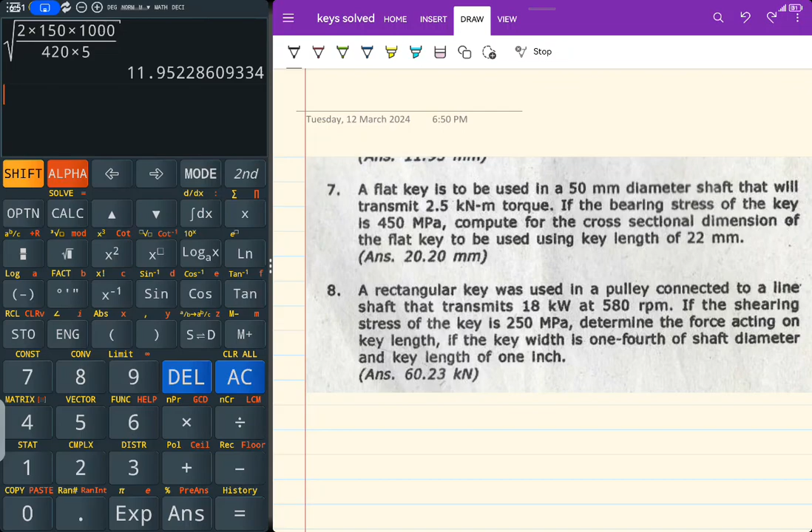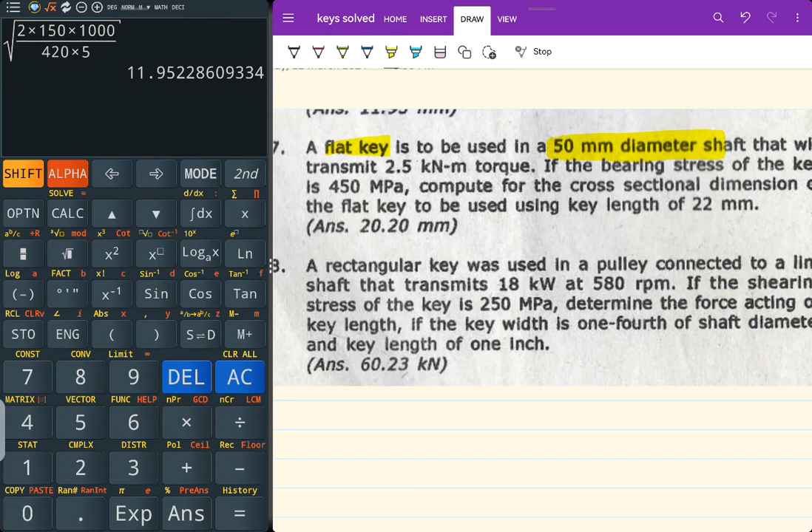So part 3, for the solved problems on keys, let's go with problem number 7 and 8. Okay? To start, a flat key is used in a 50 millimeter diameter shaft, okay, that will transmit 2.5 kilonewton meters of torque. Bearing stress na naman binigay, okay? Bearing stress is 450 MPa. Now, compute for the cross-sectional dimension of the flat key to be used using a key length of 22 mm.

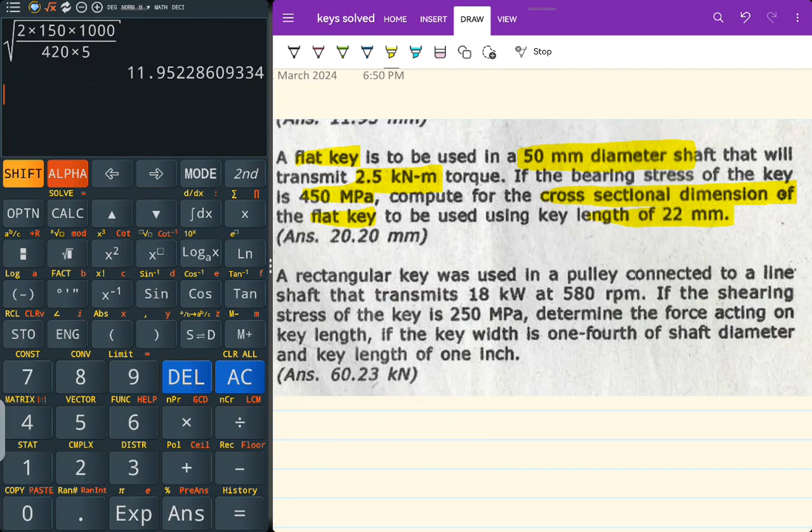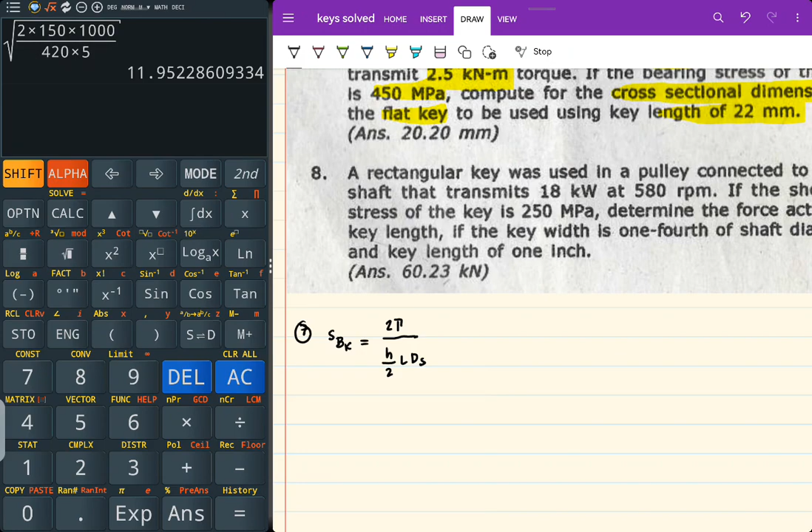So, wala tayong height. Okay? Yun yung hinahanap niya. So, for number 7, we know that SBK of the key is equal to twice of the torque, divided by H over 2 L diameter ng shaft. Simplifying, 4T divided by H L diameter of the shaft. Ang kailangan ko is H. So H is equal to 4T divided by SBK L diameter ng shaft.

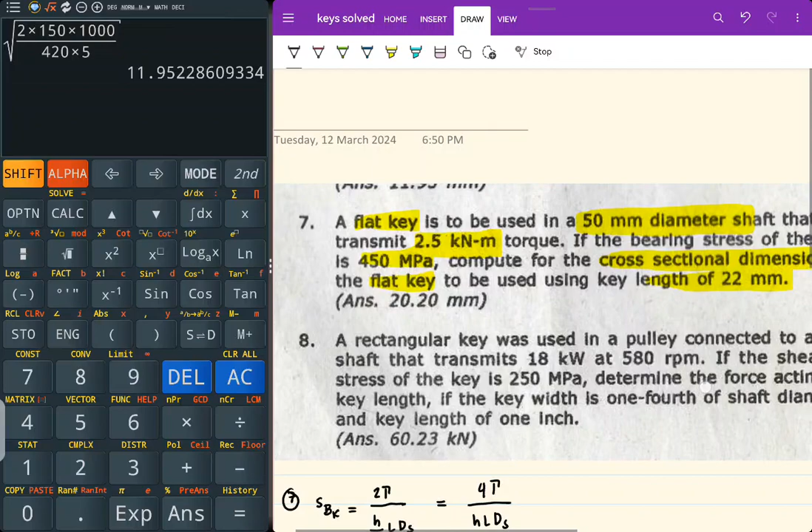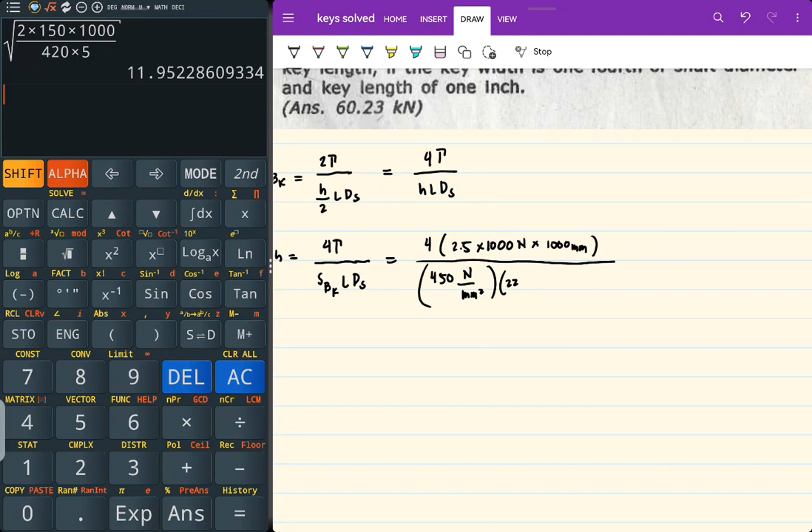4 times the torque na 2.5 kilonewton meter. 2.5 times 1,000 para maging newtons. Times yung meter, gawin ko millimeter. Times 1,000 millimeter. Divided by SBK, 450 MPa, 450 Newton per millimeter squared. Times the length of the key, 22 mm. Now, for the diameter of the shaft, 50 mm.

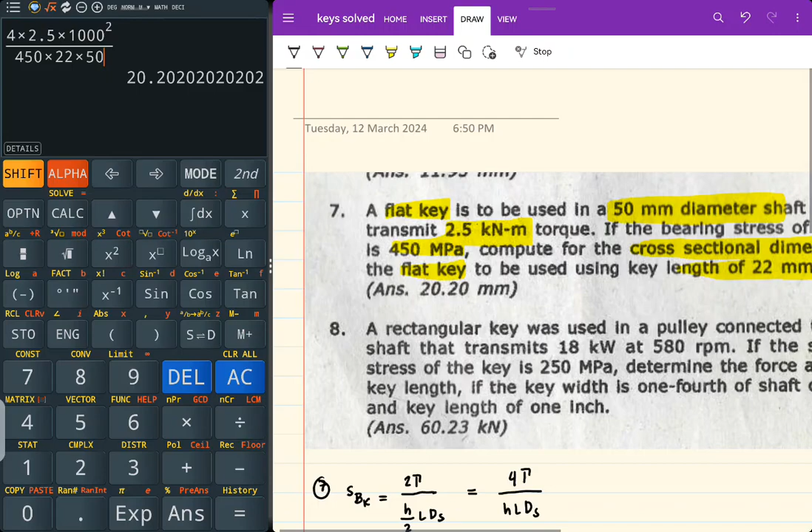Cancel all same units. Newton, Newton. Mm squared, mm squared. So, matitira is mm. Therefore, the height of the key is equal to 4 times 2.5 times 1,000. Para hindi na ako magta-type ulit ng 1,000, square ko na lang. 450 times 22 times 50. So, the answer is 20.2020 mm. Check natin if that is correct. Basic again. Next problem, number 8.

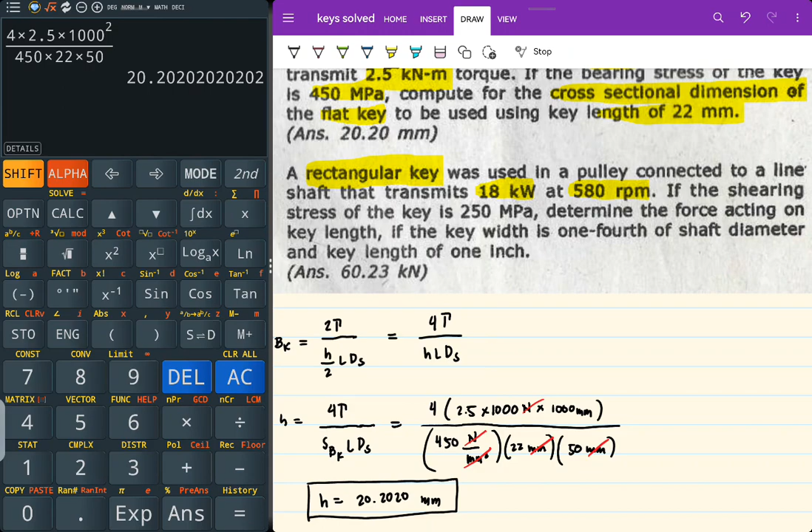A rectangular key was used in a pulley connected to a line shaft that transmits 18 kilowatts at 580 RPM. So, wag niyong pansinin yung line shaft. If the shearing stress on the key is 250 MPa, determine the force acting on the key length, if the key width is 1/4 of the shaft diameter and key length is 1 inch.

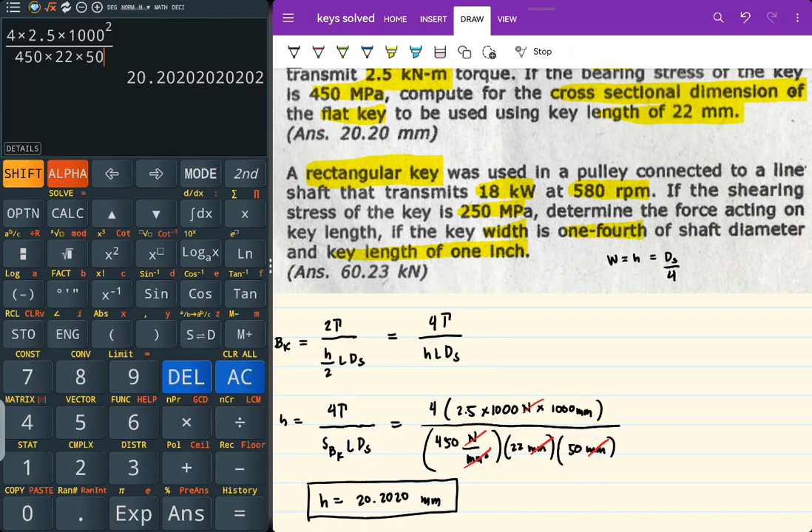Ganito yan. Kapag sinabing rectangular key or square key, W is equal to H, and that is equal to diameter ng shaft divided by 4. May binigay bang diameter ng shaft dyan? Wala. So, dito tayo magmumula para makuha natin yung torque sa power. So, for number 8, you begin with power on the shaft. Huwag mong pansinin si line shaft.

So, power is T N divided by factor. Ang binigay sa akin si power, si N. Si factor, determinable. Wala akong torque. Pwede bang gawin ko siyang in terms of the torque? So, torque on the shaft is equal to the torque on the key. This is equal to power times factor divided by N. O, as is na yan.

Tapos, meron tayong shearing stress on the key. Shear stress on the key is equal to, hindi to 16T over pi d cube ba? Mali kayo doon. So, this is shearing stress: yung force on the shaft divided by area ng shear. So, this is 2T over WLDS. Paslak po dyan yung torque.

Ano bang hinahanap natin? The force acting on the key. So, pwede na pala ako dito. Force on the shaft. Ang problema ko nga, wala akong torque. Diba? Napadaanin ko muna dito sa torque. So, sige, pwede na. Hindi ko na magagamit si SSK. Kahit di ko na gamitin yan.

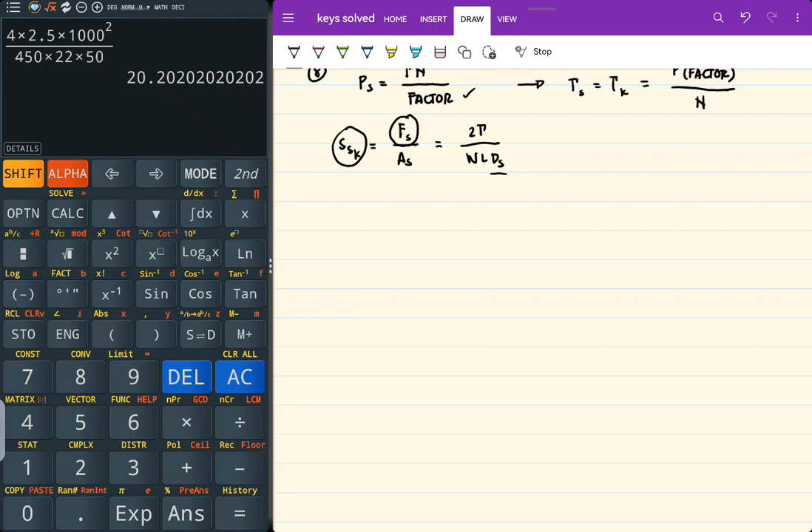Okay? Pwede bang gamitin ko muna si shearing stress ng key para makuha ko yung diameter ng shaft. Okay? Yung length ko, meron ako. Yung W is wala. Okay? But we know that W is equal to diameter of the shaft divided by 4.

Okay? Simplify natin. Shearing stress on the key is equal to 2T over W. Okay? Yung W papalitan natin. Palitan natin ng ds over 4 times L times ds. Okay, simplify natin. This will become 8T over ds squared L. Hanapin ko muna si ds.

So, ds squared is equal to 8 torque divided by SSK tapos L. So, square root. Okay? ds is equal to square root ng 8 torque. Ano yung torque natin? Torque is power times factor divided by N, SK L. Okay. Equal to, square root na natin lahat ng value.

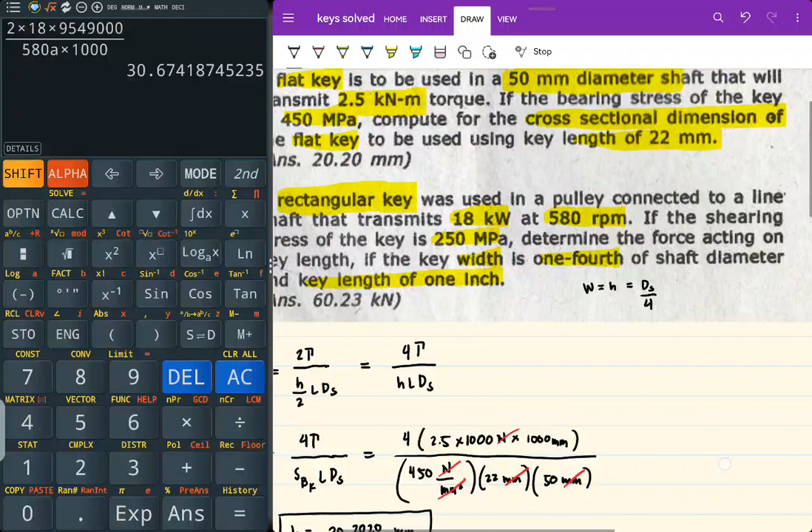bakit kulang, sir? 2 torque divided by diameter of the shaft. Okay? Bakit kulang to? Diameter of the shaft ba binigay dito? No.

Ano hinahanap? The force acting on the key length pala. Within the key length. The force acting, so, hindi na siya dapat divided by 2. Tama ba? Diameter of the shaft. Tama naman. 8. Power factor. May pinindot pa ba akong iba?

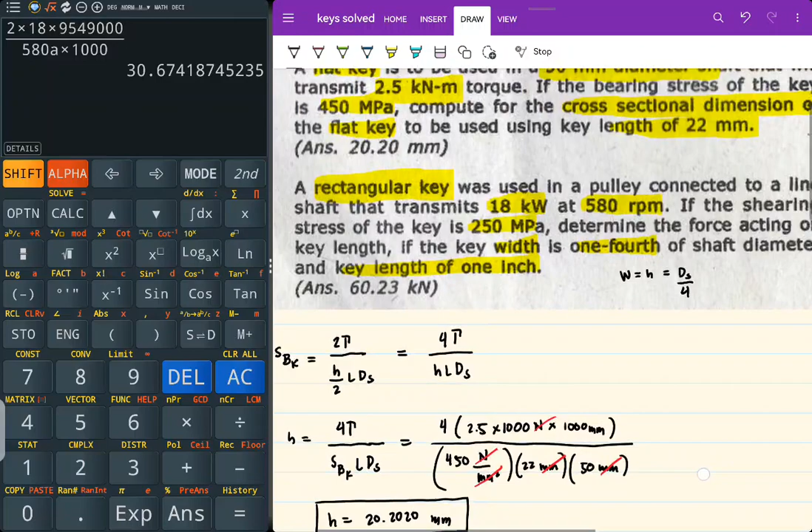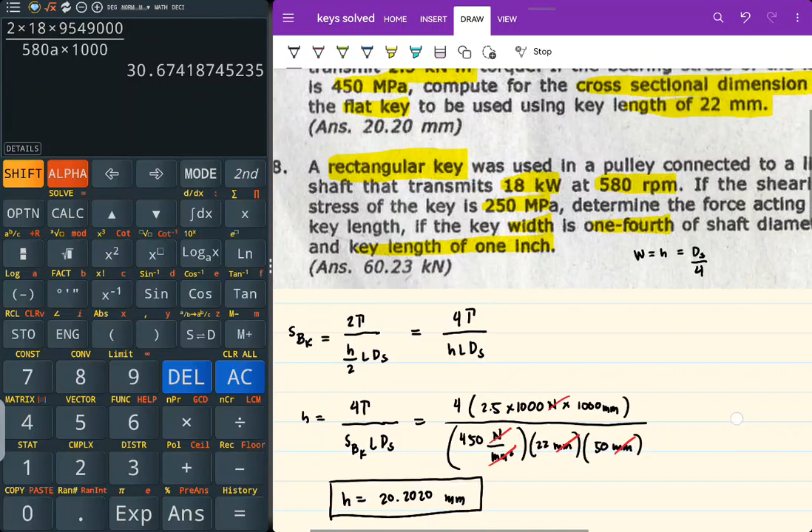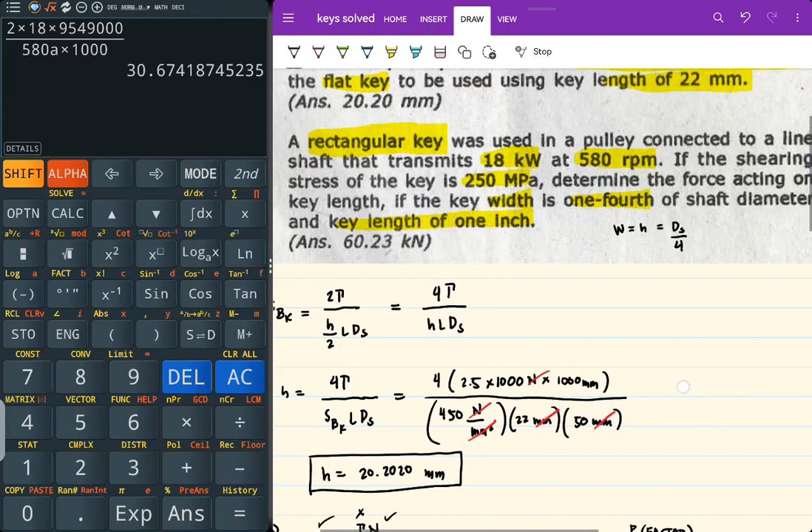Force acting on the key length. Tama kung ginalaw dyan. A rectangular key. W. 250, okay? Tama naman. So, meron akong 250. Okay.

30.6741. 6741. Okay? Multiply ko ng 2 ito. Okay? So, ito yung F natin. Let me check.